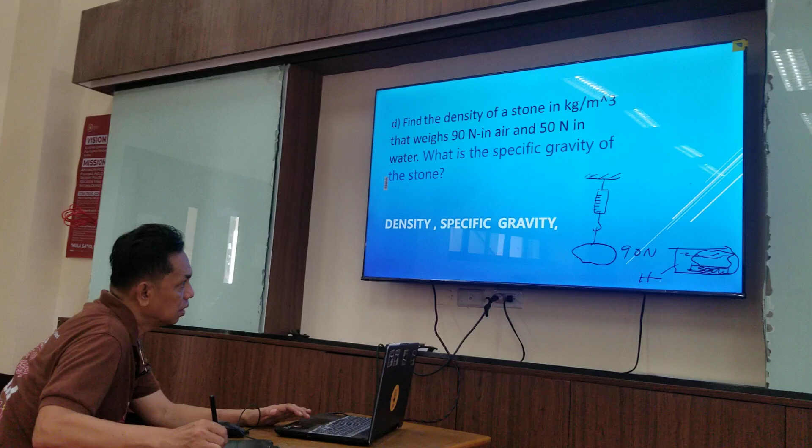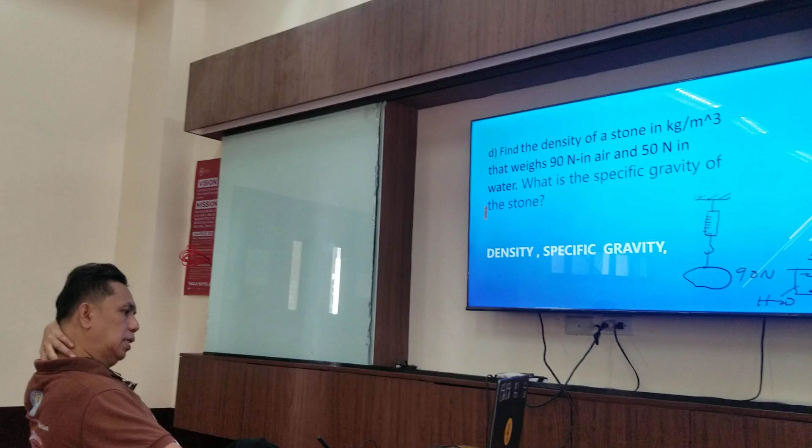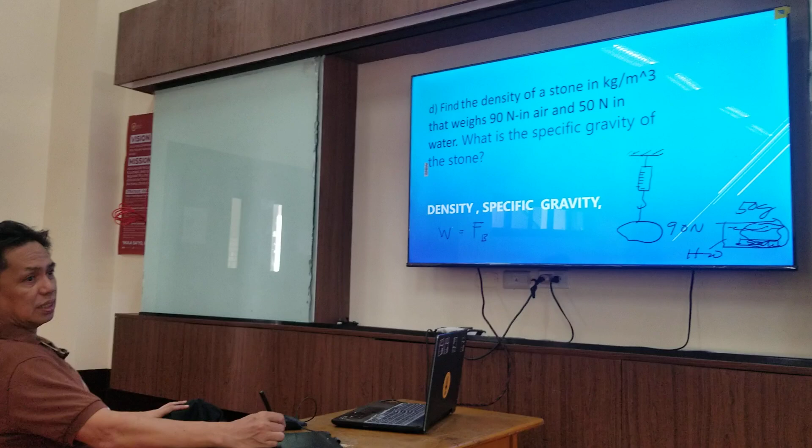Opo, sir, 50. So what is the density? So how do we get the density? Kailangan mo, sir, kunin yung buoyant force. So in problems like this, we need to get the buoyant force, force B. So the force is equivalent to what? Weight sa air, diba? The difference between how much it weighs in air and in water. So ang tawag doon ay buoyant force.

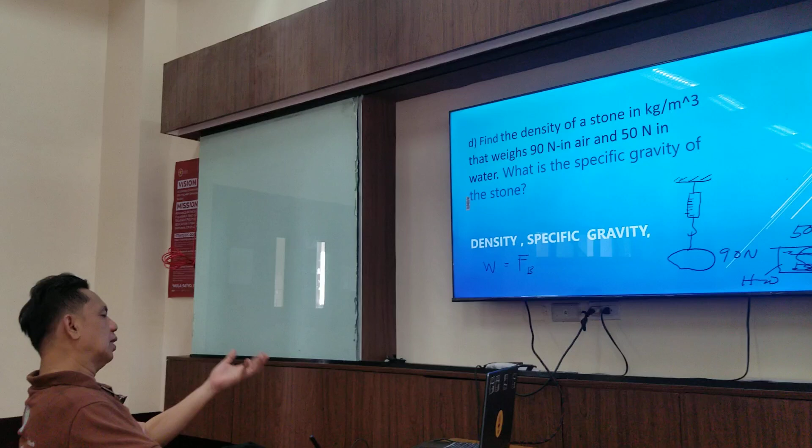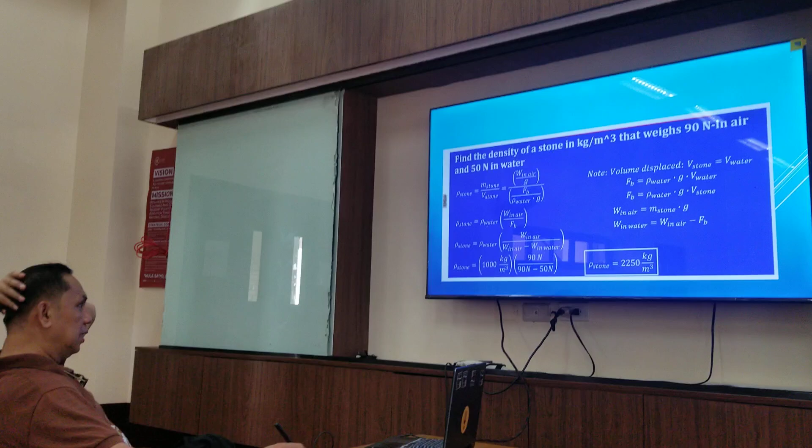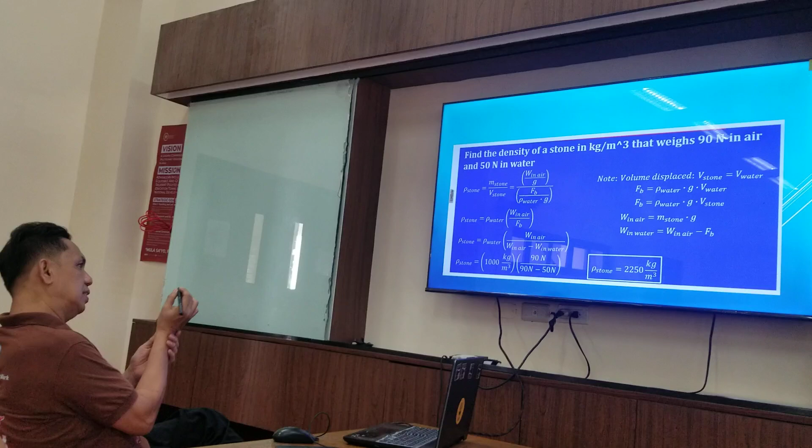Yung force na nag-lift doon sa tubig, no? So yung buoyant force ay yung weight in air minus weight in water. Okay, so let me go to the solution. That is the method, the buoyant force. So if we are going to analyze this, there are two parameters that are being asked. One is density and the other is relative density. I just added the relative density.

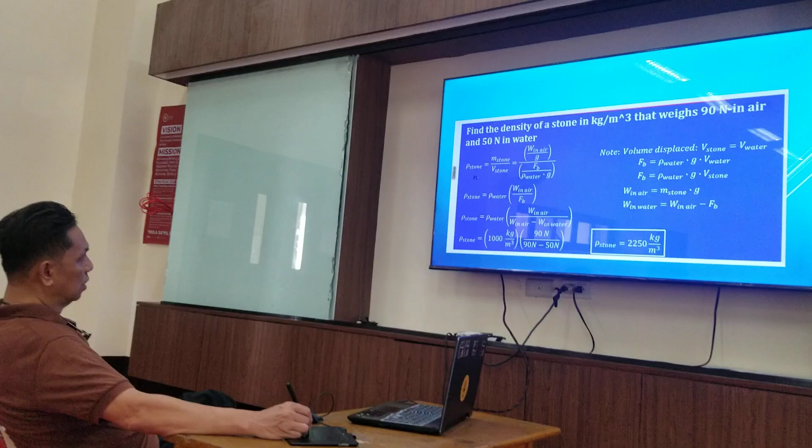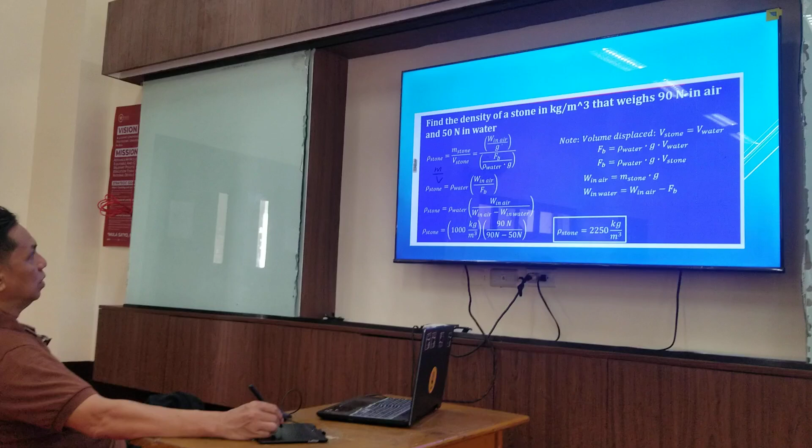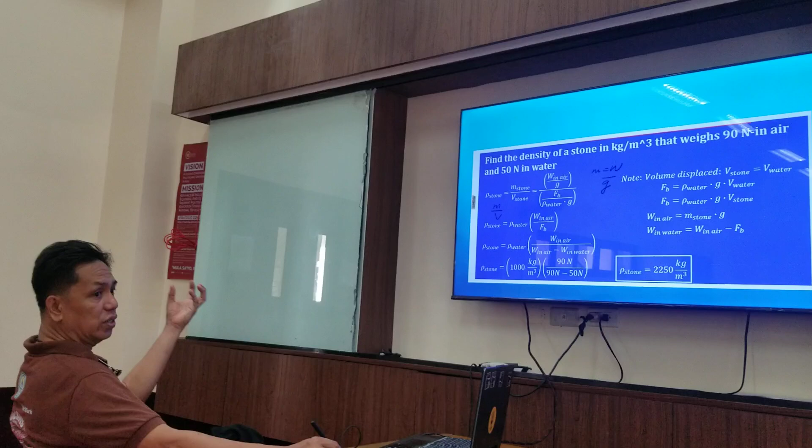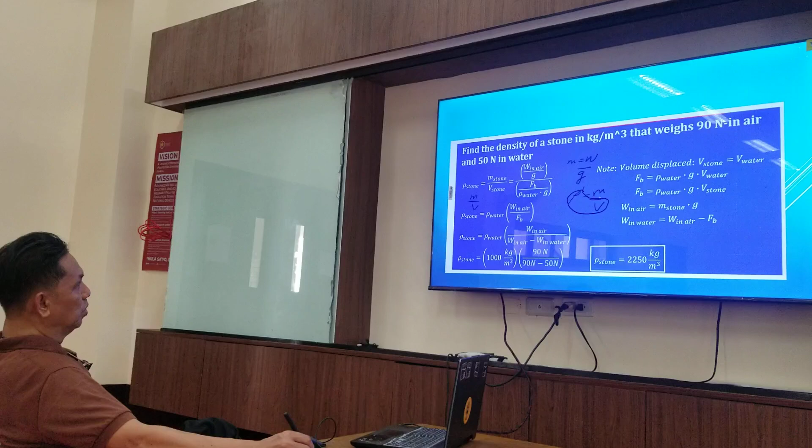But since we are trying to get the density of the stone, density is what? Mass over volume. So mass of stone over volume of stone. So what is the mass of stone? Weight in air over gravity. Correct? Opo. Because mass is weight over gravity. Ngayon, what is the volume? Density is mass over volume, so pag minultiply mo yung density at volume, mass yun. So volume is mass over density.

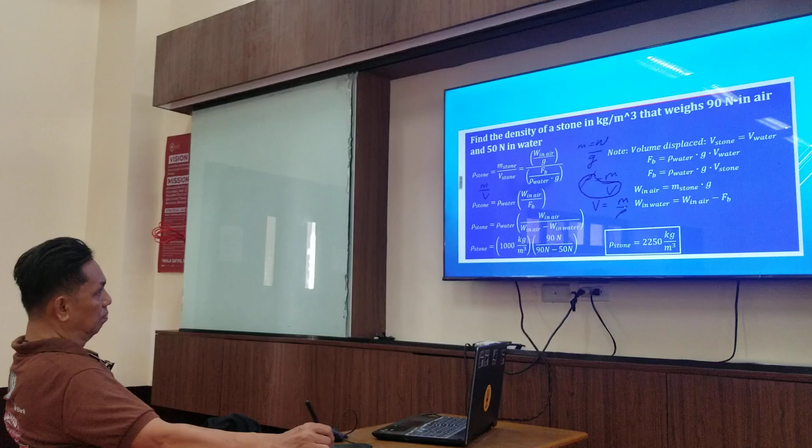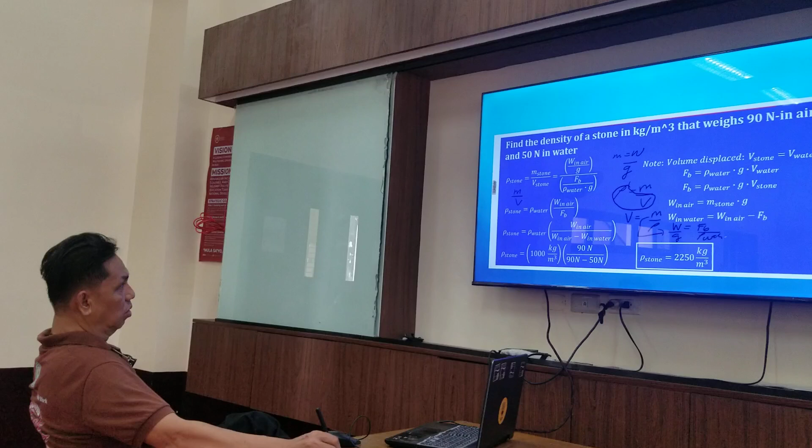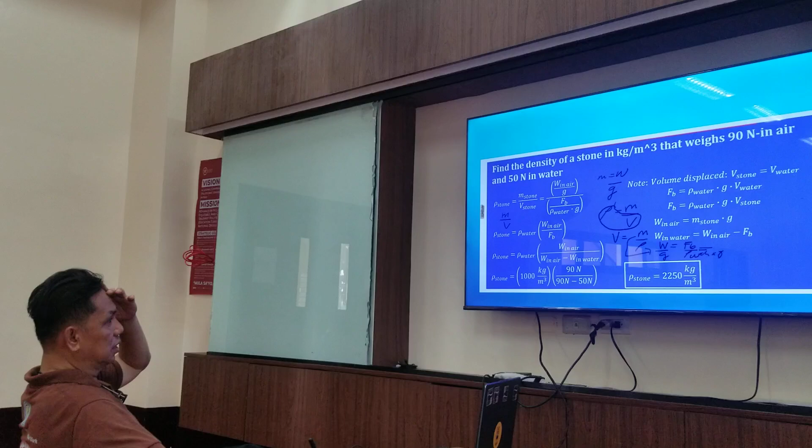But mass is what? Weight over gravity. Ang pinag-usapan ay weight, force, di ba? So yung weight na yun is yung buoyant force, kasi nasa tubig siya, yung pwersa na nag-resist sa kanya. FB over density ng water over gravity. Maliwanag yan? Opo. So mass is weight over gravity, and weight is force. Force over gravity is mass.

Tapos yung density na naiwan kanina, nakuha ba? Opo, sir. Yung mass is weight over gravity. Okay? So density of stone equals density of water times weight in air over buoyant force, diba? Both of these have gravity, right? Opo. Gravity, cancel yan.

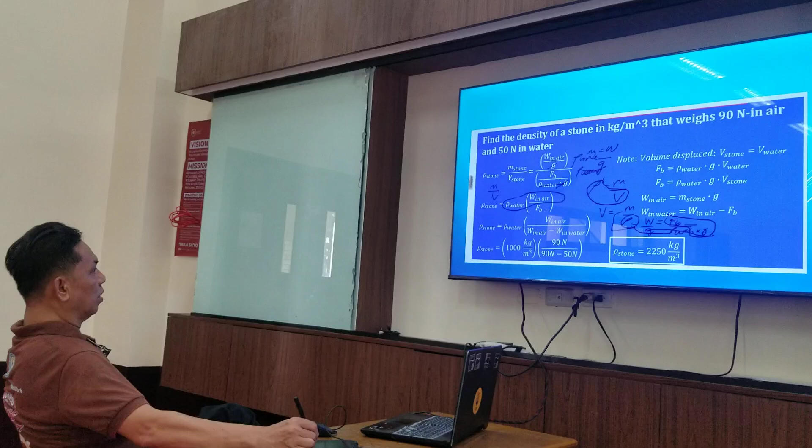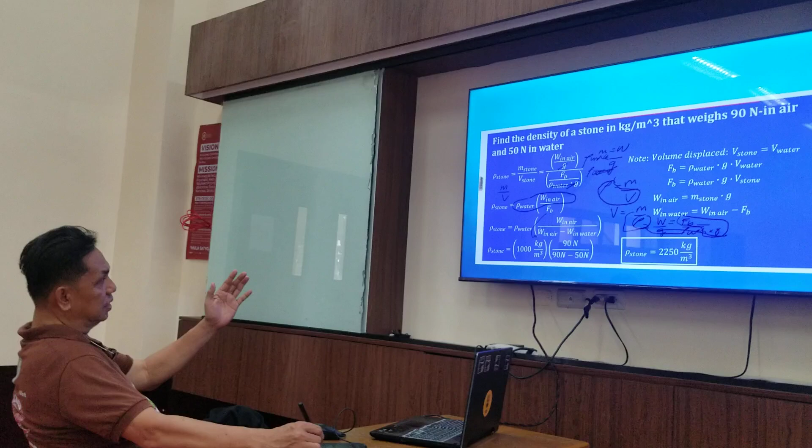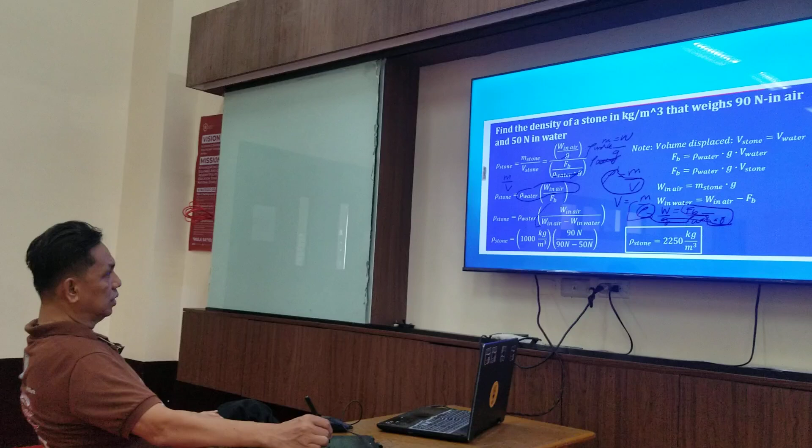Density of water times weight in air. What is buoyant force? At the beginning, buoyant force is weight in air minus weight in water. So what is the density of water? 1,000 kilogram per cubic meter. What is weight in air? Weight is force, 90 newtons. Buoyant force, 90 minus 50. Pag kinompute mo yan, 2,250 kg per meter cube, because the newtons cancel. So the density is in kilograms.

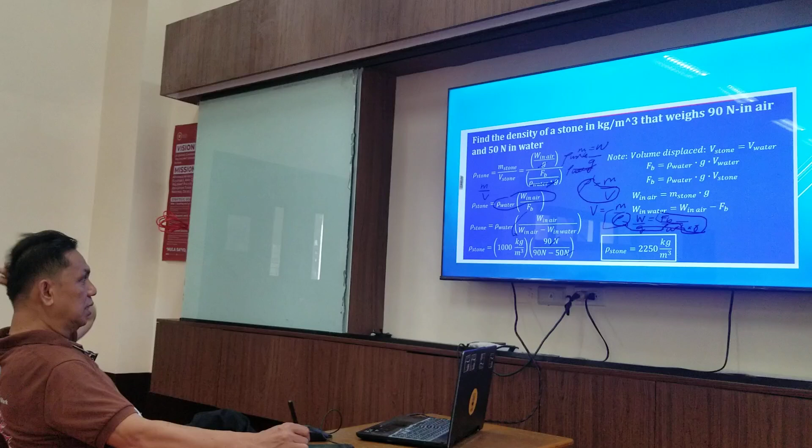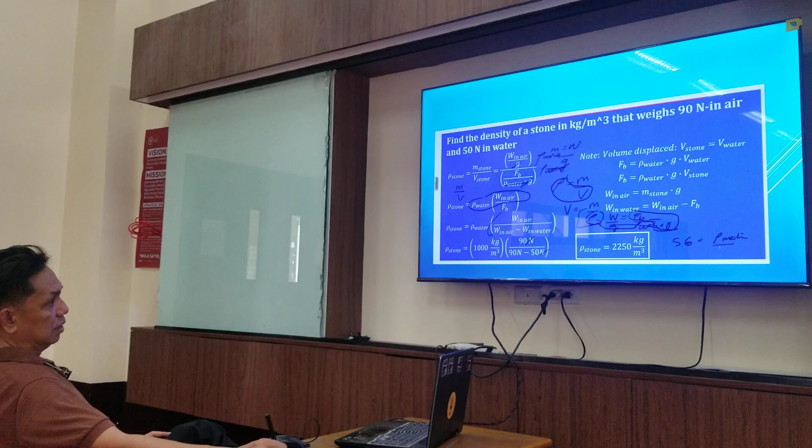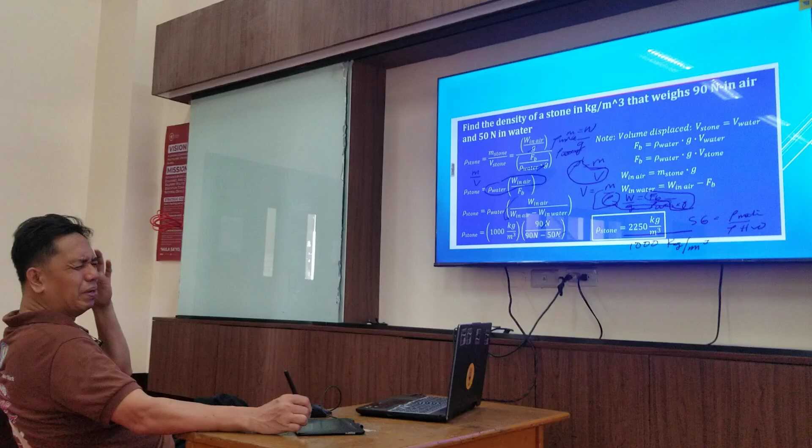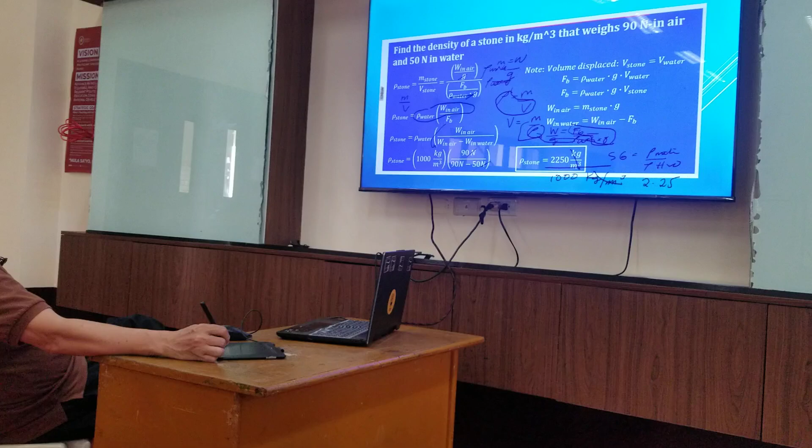How do you get the specific gravity? Specific gravity is the density of the substance or material over density of the water. So, ito yung density of the material, divide mo siya sa density of water, 1,000 kilogram per cubic meter. The specific gravity or relative density has no units, the units cancel. So divide this by 1,000, you get 2.25. Okay? Next.

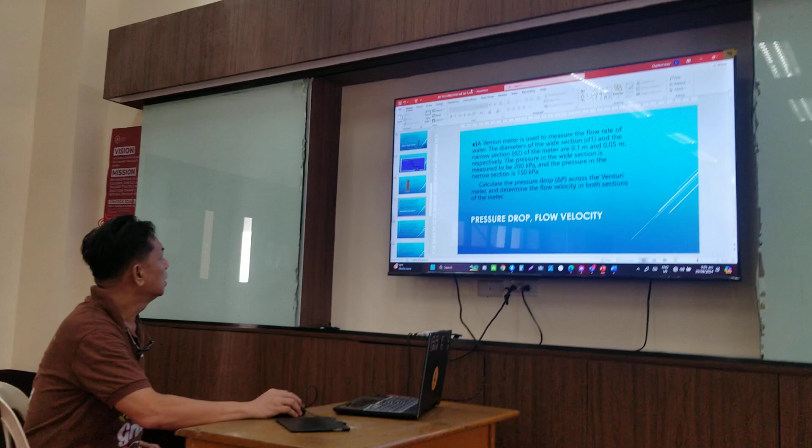Okay. So, a venturimeter is used to measure the flow rate of the water. The diameters of the wide section d1 and the narrow section d2 of the meter are given respectively. So, illustrate natin. Ang venturi, parang ganyan, tama? So, kung sinabing venturi, may restriction. Diba?

So what is the diameter? D1 is what? 0.1 meter. This is D2, the diameter. 0.05. Okay, the pressure in the wide section is what?

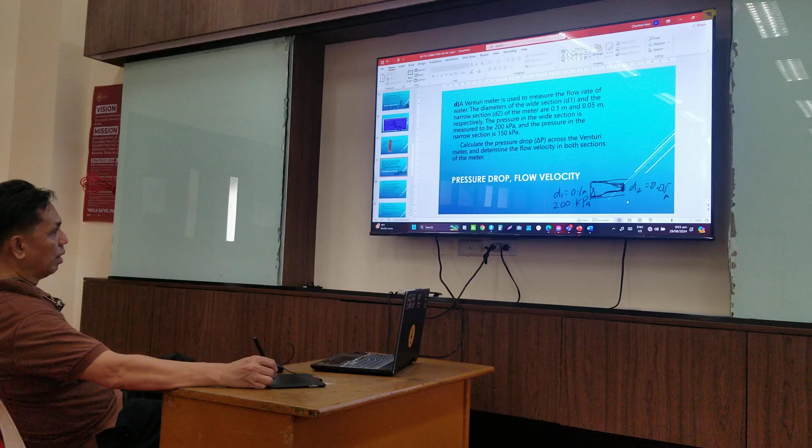200. What can you expect for the pressure at the smaller section? Is it larger or smaller? Smaller, because there's a pressure drop. So this is 200 kilopascal.

This is 150 kilopascal. Calculate the pressure drop across the venturimeter and determine the flow velocity. So what is our required? P1 minus P2, pressure, tama?

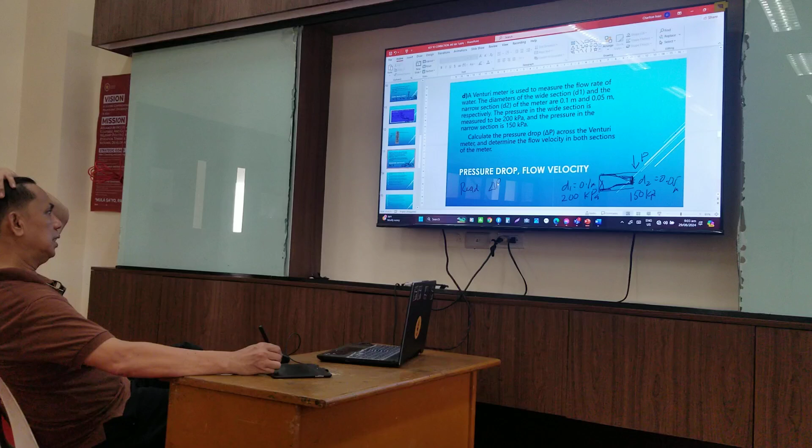The pressure or the change in pressure. Determine the flow velocity, V, tama ba yun? In both sections, so V1 and V2. So how do we compute this?

We need to compute the area. We know that the area formula is pi over 4 d squared, in terms of diameter. In terms of radius, pi R squared.

Since diameter is given, we use pi over 4. Kasi pag tinranslate mo, pag kinapin mo, nabubulo na yung mga ano. So we already know, all we have to do is substitute, since diameter yan, pi over 4.

0.1 squared, then for area 2, pi over 4, 0.05. Tama? Oo sir. So, area 2, area 1. Okay, tama? Meter square yan, meter square.

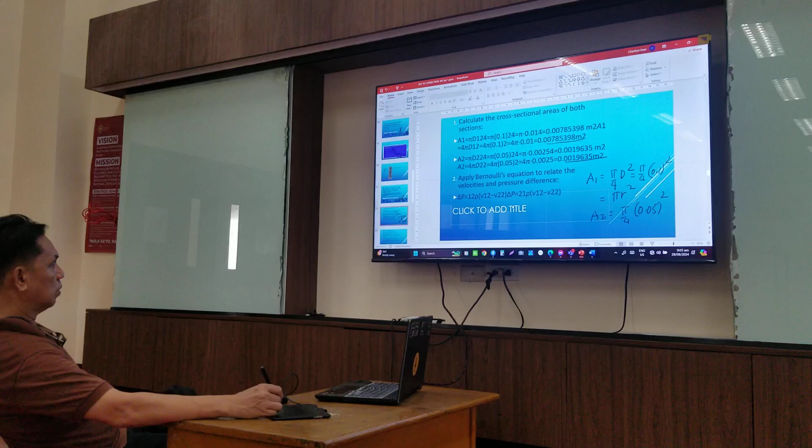So what's being asked again? Pressure drop. So paano yung pressure drop? Delta P is equals to... anong formula? Delta P is equals to P1 minus P2.

Given, sir, si pressure. Pressure ba? Given? Opo. So how do we get it? Delta P is equals to P1 minus P2, yung pinaka-formula, sir. So magiging pressure drop niya is 200 minus 150.

So 200 minus 150, kilopascal yan? Kilopascal, sir. Ano ba pinapahanap? Yung pinaka-pressure drop lang, sir.

Kala ko velocity, yung sa pangalawang given yun, sir. Ito pressure drop. Opo. So how do we get the velocity? I-minus lang po si P1 kay P2. Hindi, because Q yung equation, di ba?

Opo, Q equals AV. But Q is constant, di ba? The flow rate is constant. So ibig sabihin yan, A1V1 equals A2V2. Tama ba? Opo. Ito paano natin makukumpute? Velocity, meron ba yung velocity?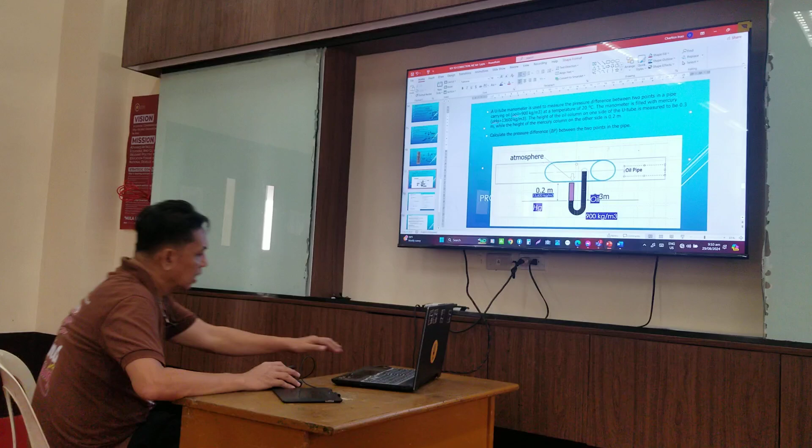Kasi, malapit na tayo magkakatapos dito, diba? Okay, makinig na dito. Ang huling problema, ilan po? 5? Opo sir, last na yan sir, 10 points diba? Tama?

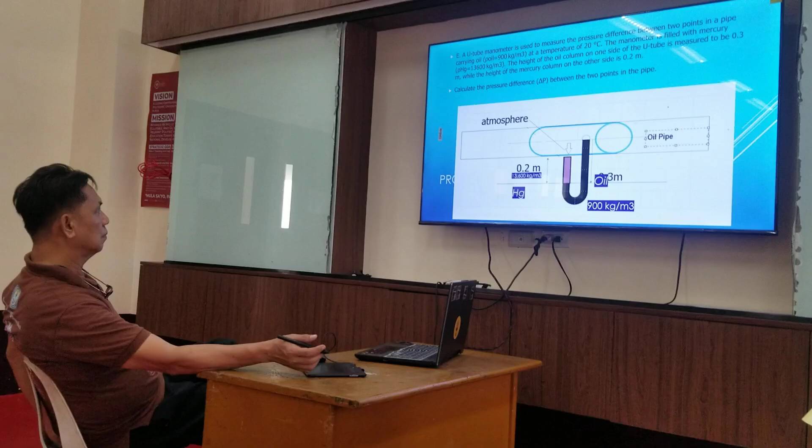Makinig tayo. A U-tube manometer. Ano ba yung U-tube? Yung naka-U, di ba? Yung U-tube is yung ganoon, porting U, yan.

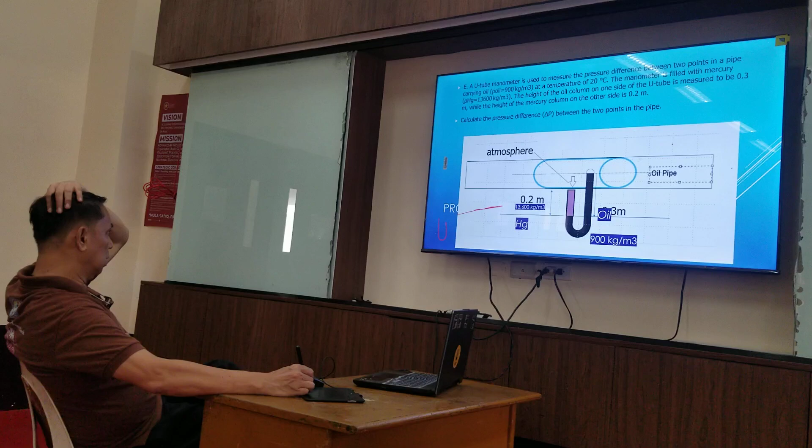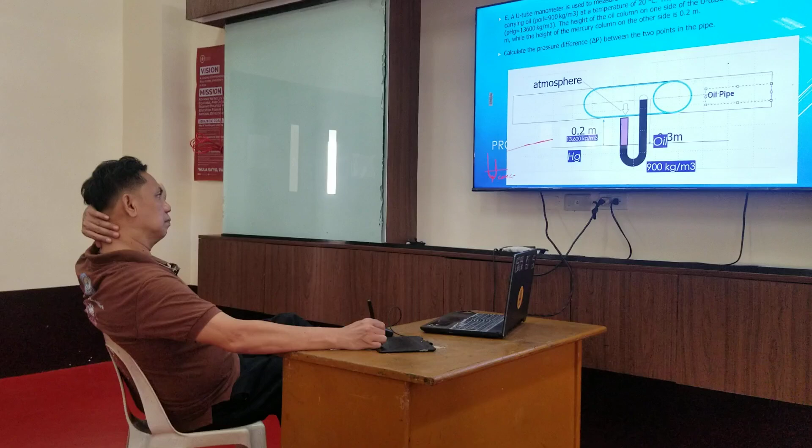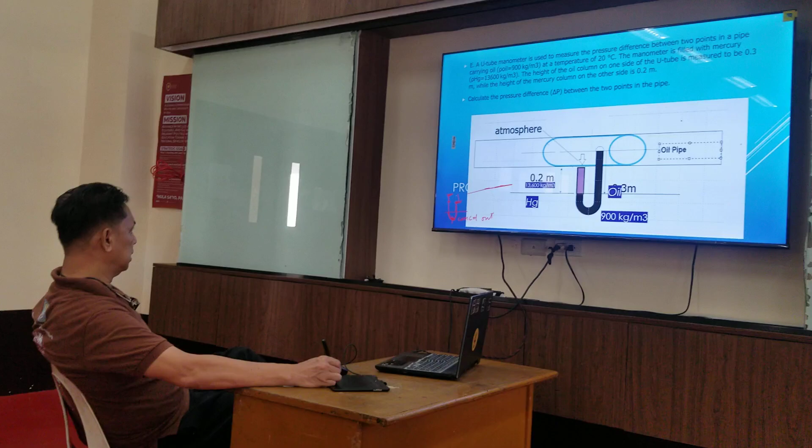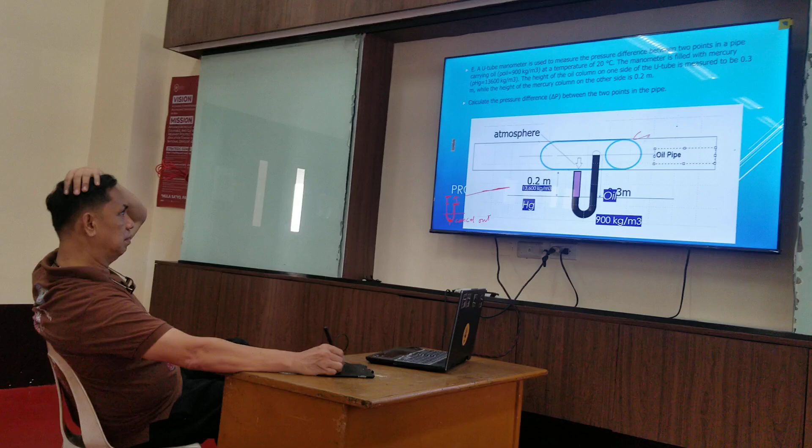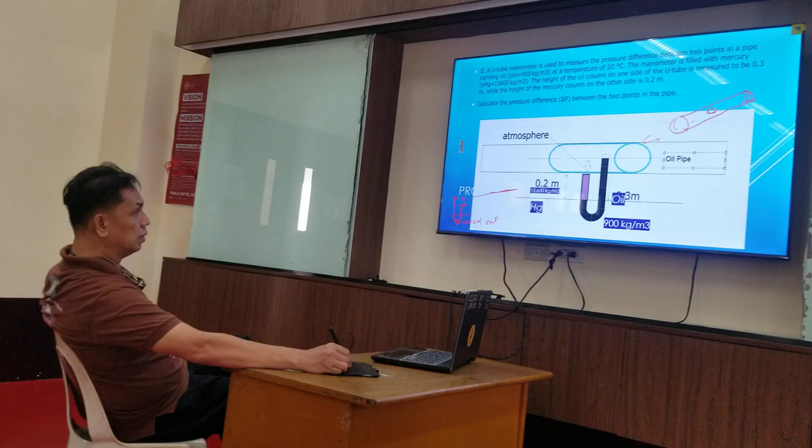So we go to the problem. A U-tube manometer, ito yun. So parang natin, kung ma-imagine niyo, merong linya ng pipe, may linya ng tubo. Paano mo ma-measure yung pressure niya? Siyempre magkakaroon ka lang dito ng fittings, meron nang fittings na nakaabang. So i-connect mo yung U-tube.

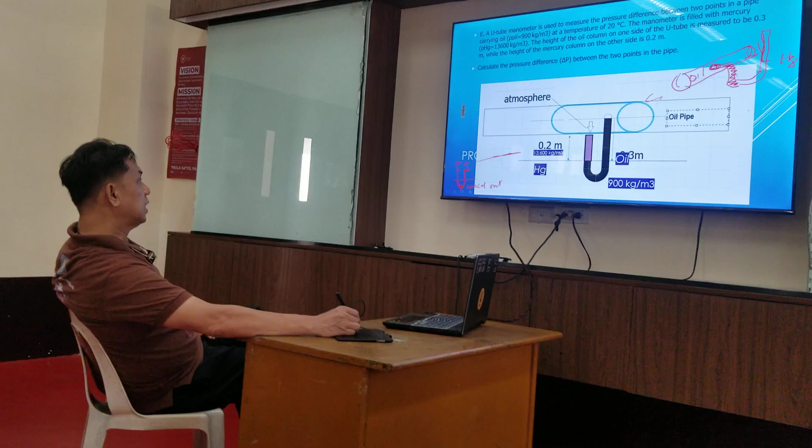So kung oil to, ano mangyari diyan? Kung oil to, oil din yan, tama? Kasi oil pipe yan eh. Pero yung pinaka-dulo niyan, normally ay ano? Anong kadalasan sa U-tube? Sa problem, anong meron yan? Mercury, mercury. So in this case, dalawa ang concern natin, ang property ng oil at property ng mercury. Pwede rin naman tubig at mercury. Since ito ay pipe, oil pipe, diba, siyempre oil kaya ginawa ko itim. So ginawa ko itim, tapos yung mercury ginawa ko silver gray.

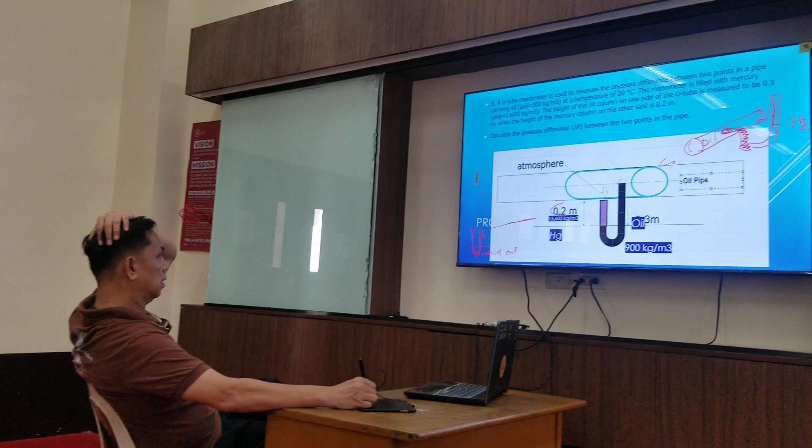So what is the height of the column of mercury? Sa problem, ano sir? 0.2 meter. Dapat yan set niyo ng reference, diba? Bakit dito? Kasi dito yung force of the fluid here will cancel out, right? So ito yung dito yan. Okay?

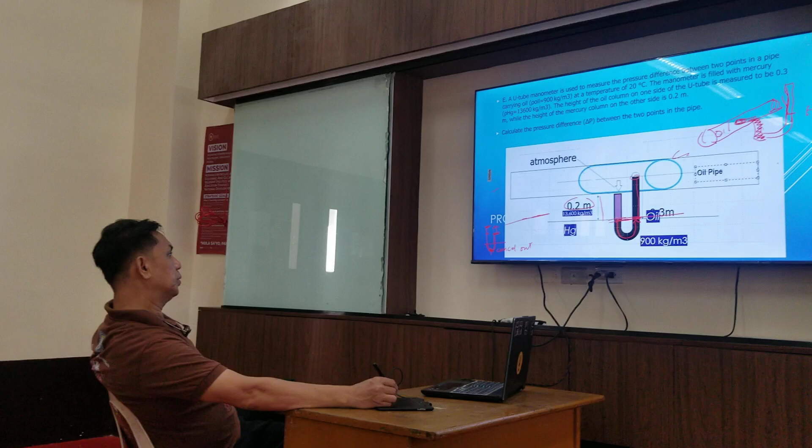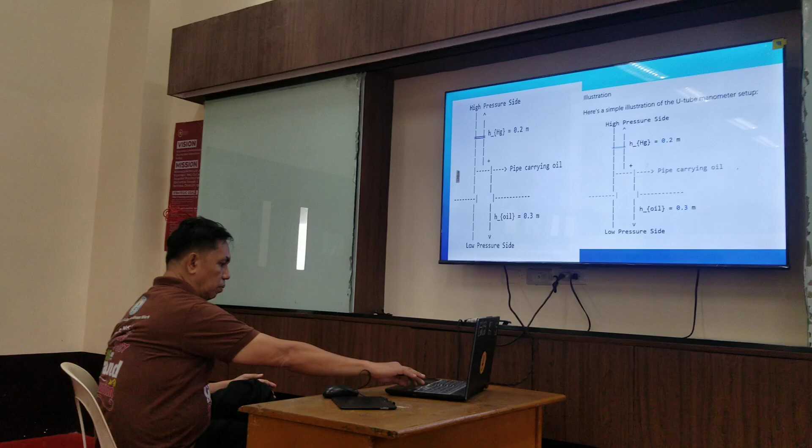Calculate the pressure difference. Paano natin na-calculate yung pressure difference? So ito rin yung illustration, yung isa ay 0.3 sa oil, tapos yung isa ay 0.2. So ano mo lang gagawin natin?

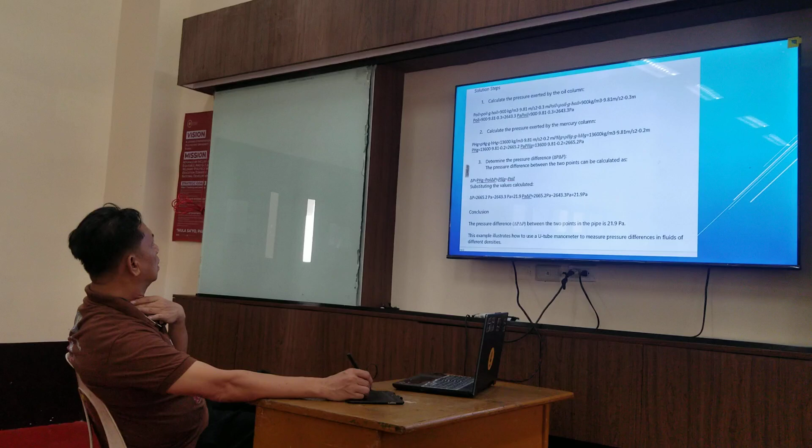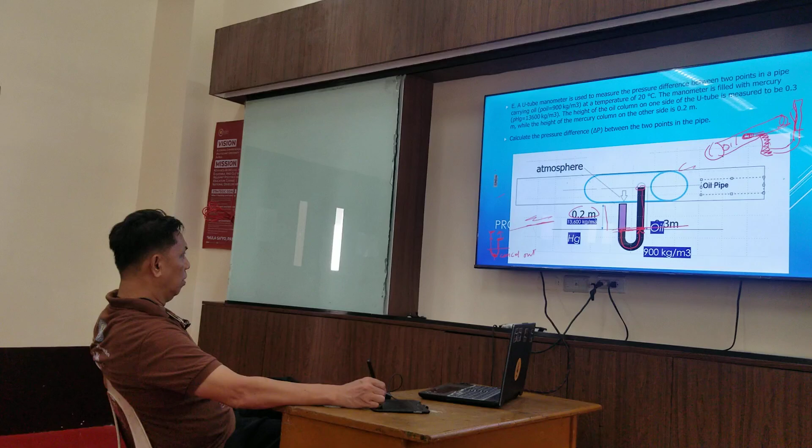I-calculate muna sir yung ano ng oil density. Density ba? Opo, hindi density, baka pressure. Ayan, diba ito yung density ng ano? This is the density of... ay hindi ganun pala sir, right? Opo, ito yung density ng mercury, ito yung density ng oil. 900 kilogram per meter cube.

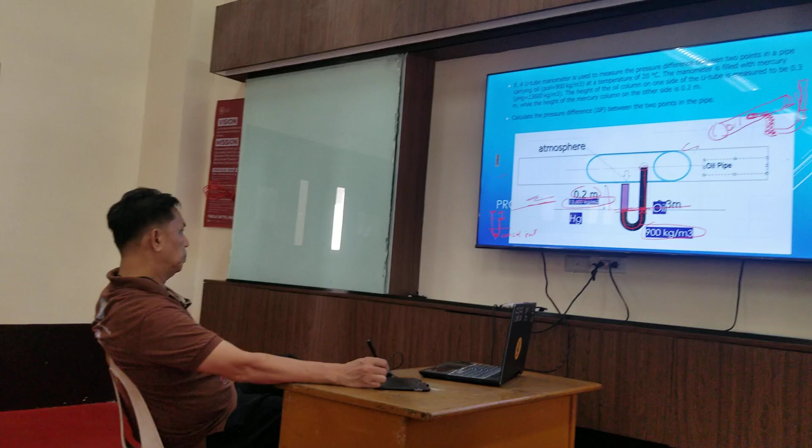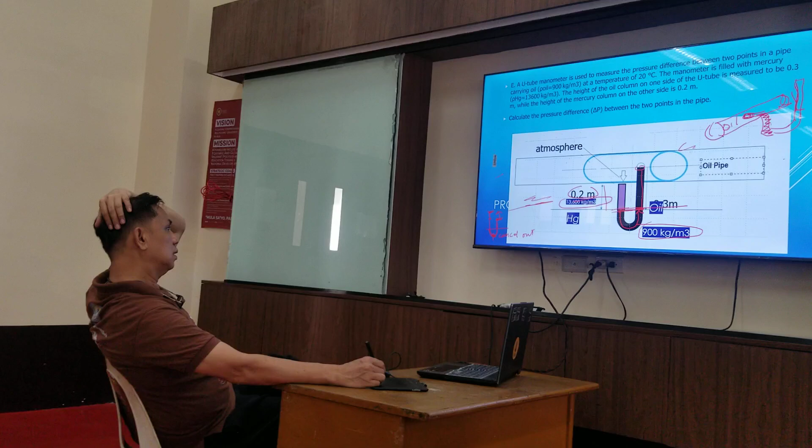So with this given, ano makukuha natin? Makukuha natin yung pressure. Kasi pressure na makukuha. How do you get the pressure in oil saka in mercury? Anong equation? Density ng mercury multiplied by gravity multiplied by height ng mercury, minus density ng oil na naka-multiply by gravity, tapos naka-multiply rin siya sa height ng oil.

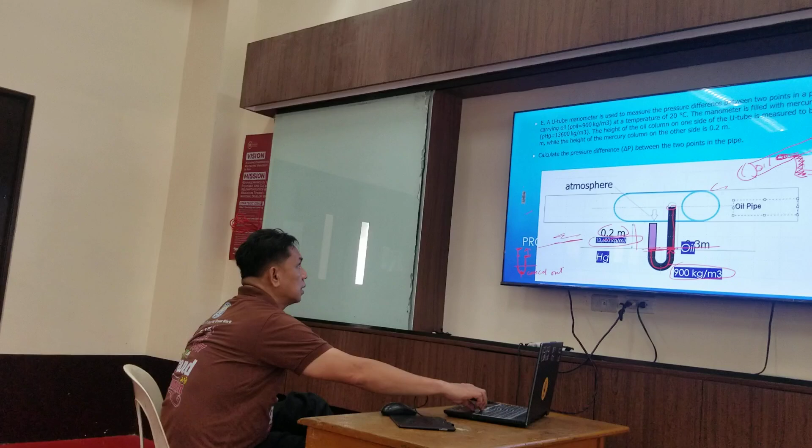Anong formula? Rho times g times H. So pag sinabi mong oil to, oil lahat yan. Tama? Density ng oil, diba? Ito naman, acceleration due to gravity. Oil, oil, yan pareho yan diba? Tapos yung height ng oil, ano ba yung height ng oil? Yung height ng oil, 0.3. Ayan, oil, tama ba? Ito, opo, diba?

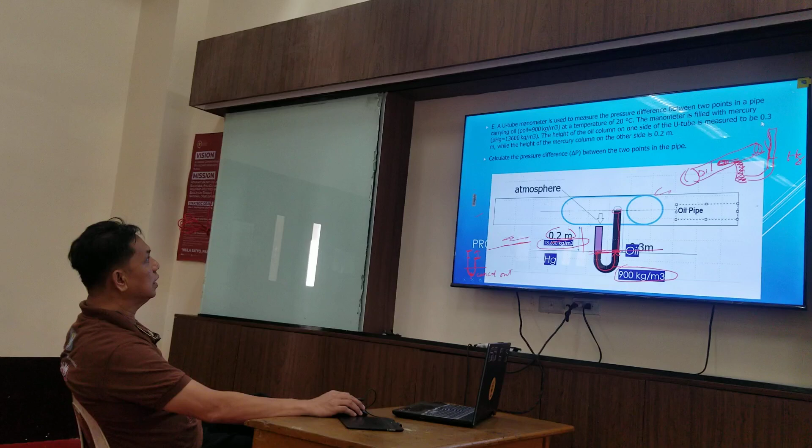Ito diba? 0.3 sir, ayan. Oil, height of oil, ano yan? 0.3 meter. Mercury, yung height of mercury ay 0.2. So substitute lang natin. Diba, oil is 0.3. So ibig sabihin dito ay 0.3. Ito ay ano? 9.81.

Density naman, binigay naman ilan? Ano sir, 900, 900 kilogram per... ilan yun? Density, pressure ng oil, ilan? Malabas ay 2648.7 Pascal, diba? Yung pressure na ito.

Check natin. What is the unit of density? Kilogram per meter cube. What is the unit of gravity, acceleration? Meter per second squared. What is the unit of head or height? Meter. If you have kilogram meter per second squared, what do you get? Newton, yung M cancel yan, tatira isang M, yung ilang matitira dito, meter squared. So Newton per meter squared, meter is what? Pascal. Yan, Pascal. Okay, so nakuha na natin yung sa oil.

Punta tayo sa mercury. The same thing, ang formula is pressure equals rho, g, h. So ito head, gravity is constant. Rho ng mercury. So rho ng mercury lang, 13,600. Ito, diba, 13,600. Nakita ba? Opo sir. So 13,600 kilogram per meter cube. Constant naman yung gravity, acceleration, 9.81 meter per second squared. And then what is the height of the mercury? 0.2. 0.2, ayan, nakita ba ito?